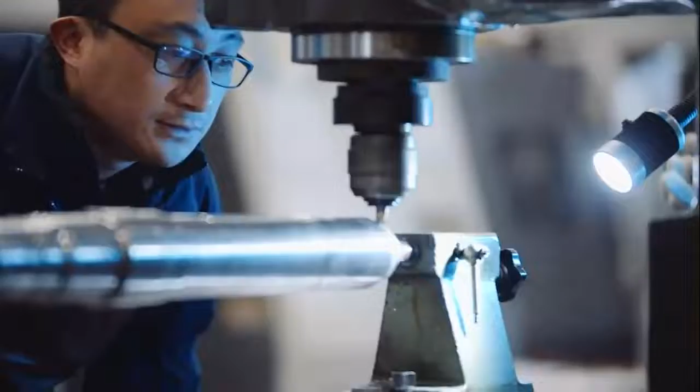Have you ever wondered what drives us? That thing that inspires us, makes our eyes shine, and motivates us to achieve more and more? We are WEG, driven by energy, technology, challenges, and opportunities. Therefore, every day we take new steps, open new paths, and evolve, addressing the future as a subject of the present.

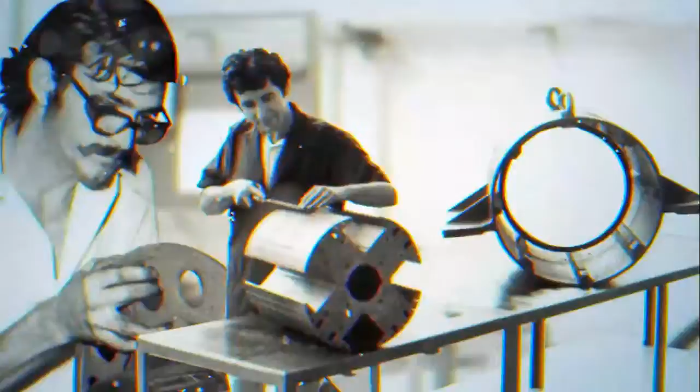WEG has always kept an eye on the future. Everything started in 1961 in the city of Jaraguá do Sul, when an electrician, an administrator, and a mechanic decided to join experiences to start an enterprise. Werner, Eggon, and Geraldo founded WEG. Initially producing electric motors, WEG grew year after year, expanded its product line, and turned into a global solution with electrical machines and automation for the industry and power systems.

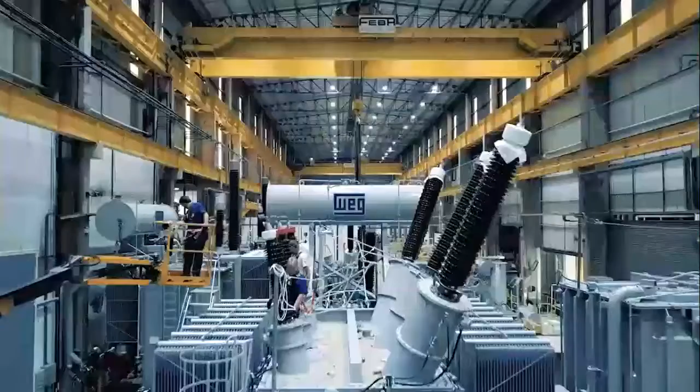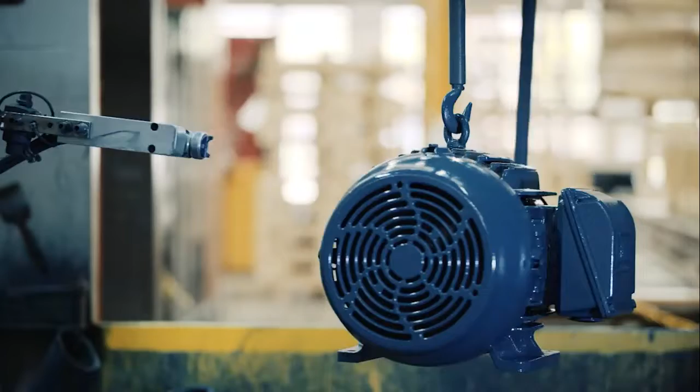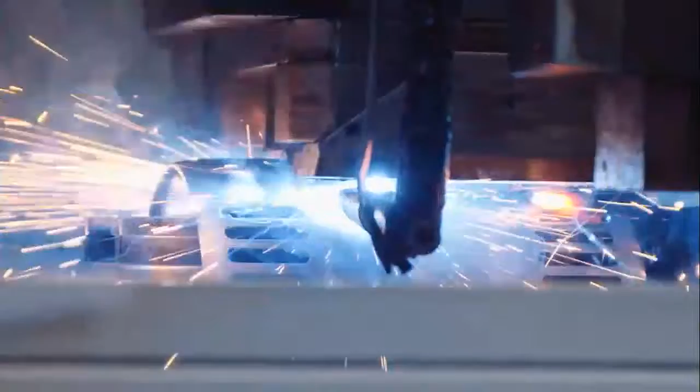When it comes to energy, WEG is the name that you commonly hear. In addition to being one of the largest manufacturers of electrical machines in the world, WEG is a synonym for intelligent technology solutions, offering products that consume less energy, produce more, and automate processes. Our electric motors are a good example. Developed with constant technological evolution, they deliver high performance and maximum energy efficiency.

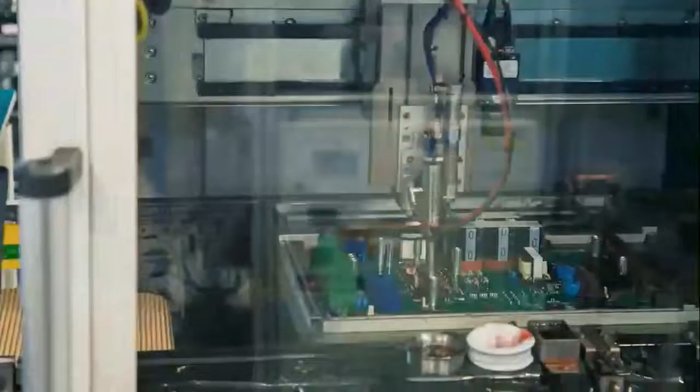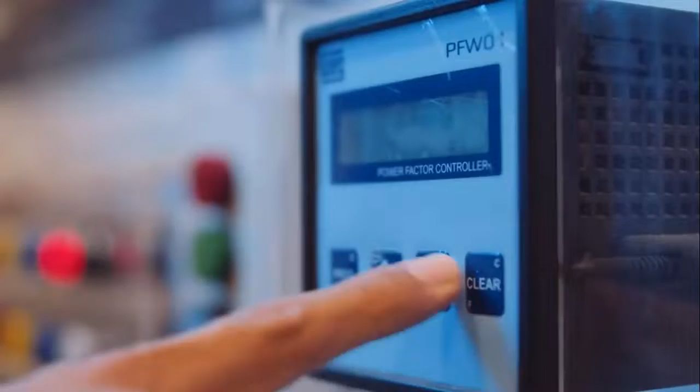In the generation, transmission, and distribution of electric energy, we have the challenge of creating renewable energy sources, meeting social, economic, and environmental demands. We also develop innovative, efficient, and safe products to protect electronic equipment and information. In addition, we produce solutions for electrical mobility, develop automation technology for enterprises, and make liquid and powder coatings and electrical insulating varnishes. Whenever a new energy issue arises, you can bet we at WEG are already studying the subject.

Evolution and continuous improvement are in our DNA. We believe that it is always possible to do better. Thinking about technological innovation is a culture that has been present since the foundation. With an eye on the future, we at WEG work to become more competitive, more connected and efficient, contributing to the sustainable development. Foreseeing trends such as Industry 4.0, new energy sources, and electrical mobility, working to create more efficient industries and cities, being in constant evolution, always seeking new technologies and solutions.

The constant investment in research and building of a robust team of experts in Brazil and in the world dedicated to generating ideas have produced an increasing number of innovations. What the world will see tomorrow, we at WEG are developing today. If there is one thing we like, it is facing challenges. Whether locally or globally, we keep on crossing borders.

The internationalization of WEG began in 1968. In the 90s, this process gained momentum with the opening of offices in strategic countries. The 2000s were decisive for our global presence, with the installation of the first manufacturing plant abroad. This will to expand horizons only grows and motivates the search for increasingly demanding international quality levels. Today, we have manufacturing plants in 12 countries and a business office structure able to serve the whole world.

Every day, several opportunities for personal and professional development are created. One of them is the WEG Training Center, a vocational training school that qualifies the young apprentice to work in technical activities. Founded in 1968, the center has trained thousands of students, preparing them to be part of the technology and innovation world, and teaching them ethics and integrity concepts. WEG's cycle of opportunities is completed with technical courses and job openings available at the units around the world. Thus, each employee has a chance to develop both professionally and personally.

We are WEG, driven by energy, technology, challenges, and opportunities. A company that will keep every day taking new steps, opening new paths, evolving and addressing the future as a subject of the present. WEG, transforming energy into solutions.

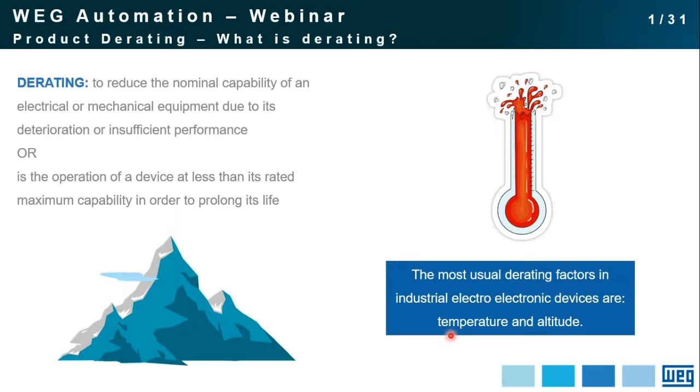So what are the most usual derating factors? So for the industrial electro-electronic devices, we consider that's temperature and altitude. So what is temperature? Basically, temperature is the measure of the average kinetic energy of the particles of a substance. Basically, it's what you measure with a thermometer in a comparable scale that can be degrees Celsius, degrees Fahrenheit, or Kelvin.

Another concept that is really close to temperature is heat. So what is that? It's the thermal energy in transit. Basically, it's the energy that flows from a hot body to a cold one. Basically, it's the flow of energy between bodies. And how does the heat transfer? Basically, it can happen through three ways. Conduction, which is through solid materials, convection, which is through the movement of air, and also through radiation, which is through electromagnetic waves.

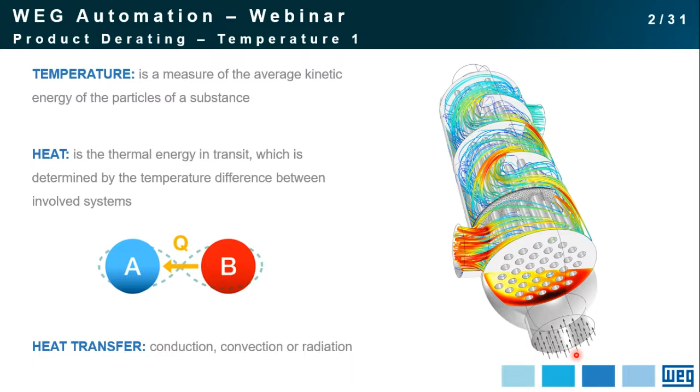So what are the problems and risks that you can have by applying a product in temperature above its nominal? So properties can be altered. So color can change, consistency can change. You can also have deformation of the materials, and then it can lead to equipment breakdown and maybe even constant replacement, which will affect your productivity in your process. So you can not only lose money by changing components in a machine, but also because you cannot make your production constant. And at the end, depending on the problem you have, you can have a permanent equipment damage. So then you have to change the whole machine.

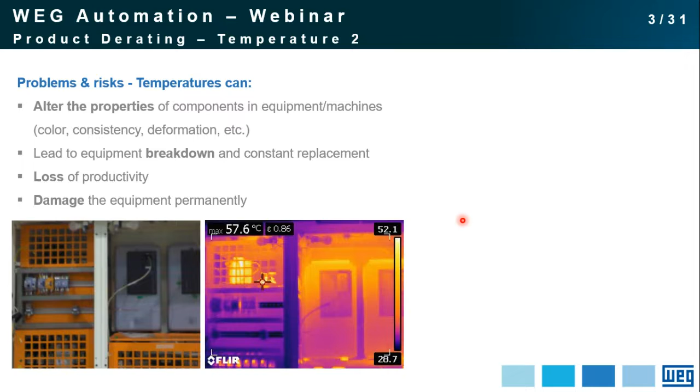Another concept I can give you here, another example, is for electrical motors. By using this motor at a higher temperature, for example 10 degrees Celsius above the thermal class limit of the motor insulation, you can reduce the lifespan of this motor by half. So imagine the impact that you would have in your industry, in your process plant, by having a reduced lifetime of all your motors, especially by half.

So where can we find these high temperature places? There are a lot of places on the globe where temperatures can be very, very high, like in arid regions or in tropical regions. And in those regions, we can find industrial installations where the internal temperature of the installation will be even higher. And imagine equipment inside a panel inside this installation in a very hot area. So you have this cumulative effect.

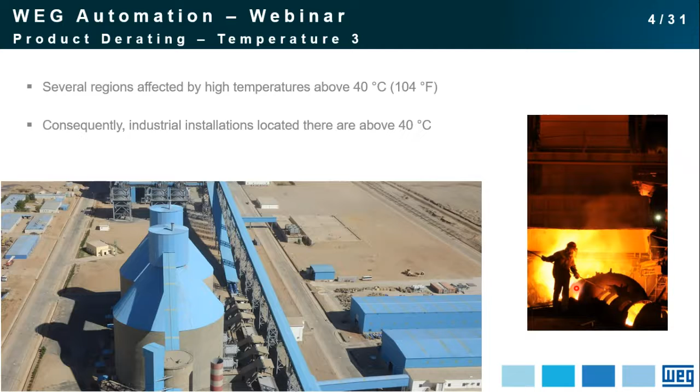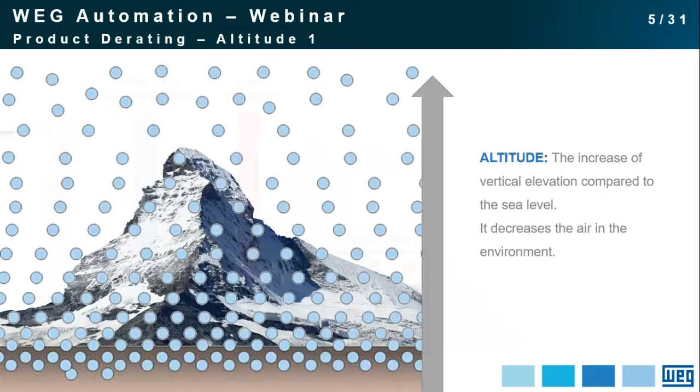But as time goes by, these blue particles representing the air surrounding the equipment will absorb part of this heat, and over time, the air around the equipment will absorb most of the equipment's heat, meaning that the equipment temperature will go down, the equipment will cool off.

But with the same equipment at a higher altitude, here at the peak of this mountain, that's not going to happen, because the density, the concentration of gas at the peak of this mountain, is not as big as at sea level, meaning you have fewer blue particles to absorb this heat. Even after some time, the air will absorb part of it, but not enough, because you don't have enough air to absorb this heat, meaning that the equipment will remain hot.

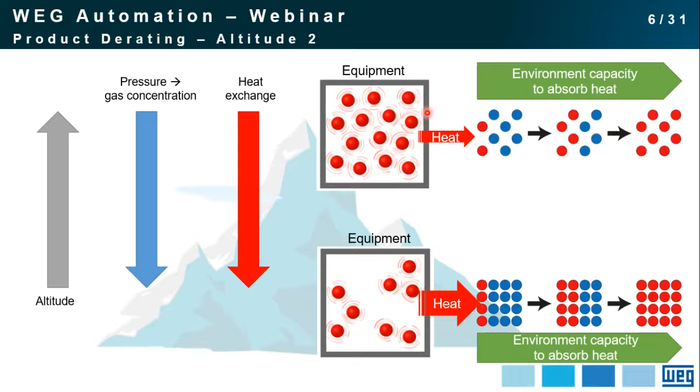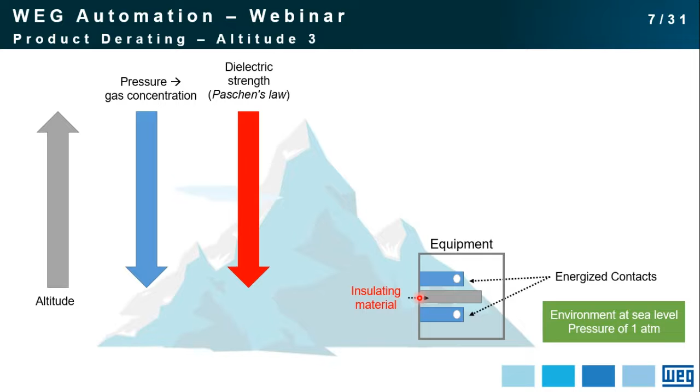Here we have another effect of altitude that can affect your device, your equipment. As we go up in altitude, we know that pressure goes down, gas concentration goes down, but also the dielectric strength goes down according to Paschen's law. So how does it happen? Let's take equipment, once again, at sea level with a pressure of 1 atm. Let's say it's a contactor. Here we have two energized contacts, and you have an insulating material between them. So the operation here is completely safe.

But because we are going up with the same equipment, the dielectric strength goes down, meaning that you need less voltage to break it. The breakdown voltage of the air at high altitudes is much lower, meaning that an arc could happen. And in this case, it would be a short circuit between phases, which can be really dangerous.

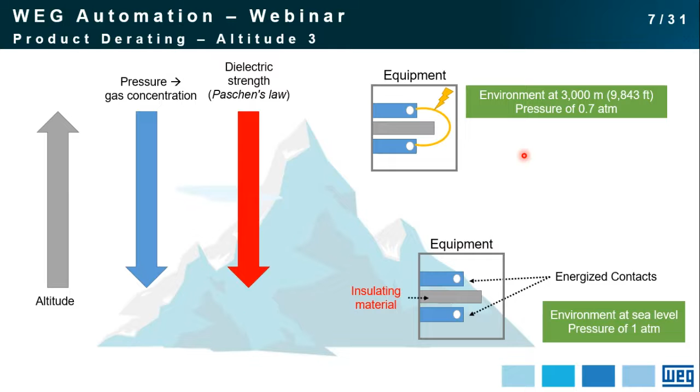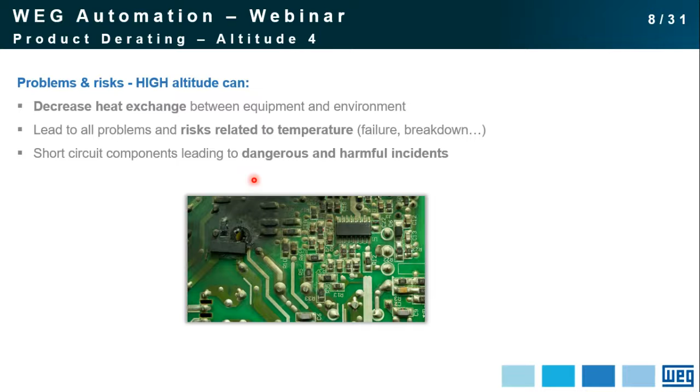So what are the problems and risks related to high altitude? So what can it cause? It can decrease the heat exchange between equipment and environment, which is bad. It can lead to all problems and risks related to temperature, like failure and breakdown that I have explained a few slides ago. And also it can lead to short circuit in the components, leading to really dangerous and harmful incidents like fire or something else.

So now that we have learned these two main factors that can affect the performance of an electrical equipment, what can we do about it? How do we solve it? Well, we have to apply some derating factors when needed. So the idea is to keep the life of the product operating in a lower capacity. But before we start, I would like to say 3 points.

First, all electro-electronic devices are subjected to these derating factors because the physics is there for everyone. If you take any product to the peak of a mountain, 3,000 meters high, they will be somehow affected. The temperature is the same. But in this presentation, and because this is a WEG webinar, I'm going to give examples with WEG products, obviously.

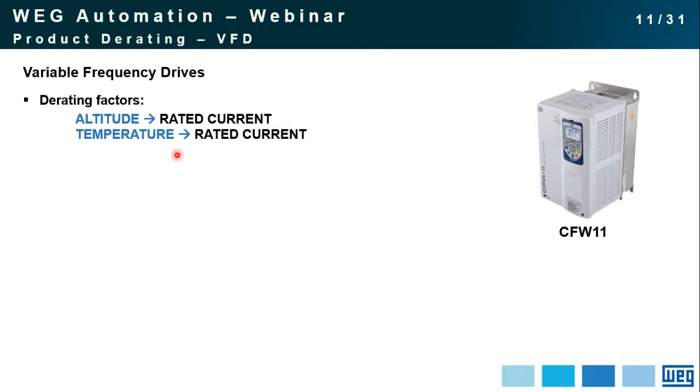Let's go to the first product. The first one is a variable frequency drive that I will simply call drive. The main effect of the derating factors is on the rated current. Both altitude and temperature affect the rated current of this product. So if we take technical data from this specific CFW11 up to 88 amps and in this IP degree of protection, we can learn that we can use up to 1000 meters without any derating, and we can use from -10 to +50 degrees Celsius normally.

However, if you have to exceed these limits because your application requires, we have these two tables here for each factor. First one is altitude. As we go up in altitude, we have to use these factors here. So if you have, for example, a 10 amp VFD and you have to apply it at 4,000 meters, you have to multiply by 0.7, meaning that the CFW11 can only deliver 7 amps. Another way of saying that, instead of multiplying by a factor, is decreasing by a percentage. I'm going to give some examples about it later.

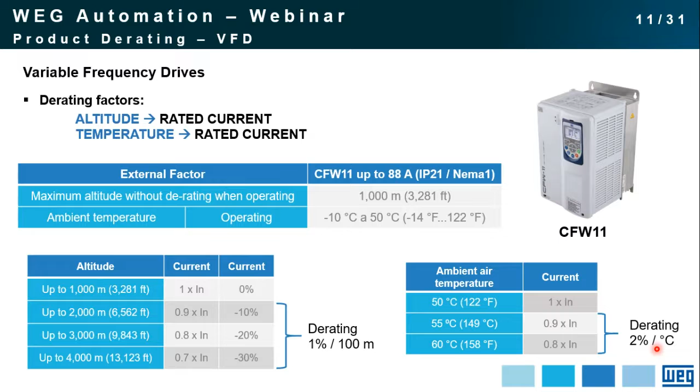And here on the right, we have a similar table, but for temperature. Another way of saying that is that in this case, for every 100 meters you go up, you have a derating of 1% in rated current. The same happens with temperature, however, it's 2% per degree Celsius. So let's make an example to clarify it. Let's say that you have to size a VFD for a 43 amp motor applied at 4,000 meters of altitude. What do we do?

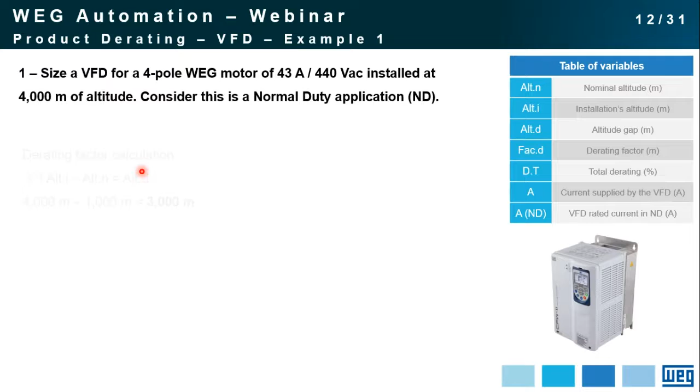First, you have to calculate this gap in altitude between the application altitude and the maximum altitude you can apply this VFD without any derating. In this case, it's 3,000 meters. Then use this value and multiply by the factor.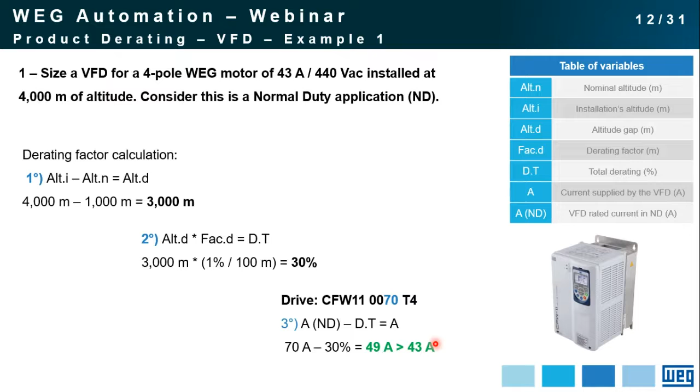We have learned that for every 100 meters you go up in altitude, you decrease 1%, meaning the total derating is 30%. So let's select, for example, a 70 amp VFD. You take the nominal current of 70 amps and then you decrease 30%. The final value is 49 amps, which is higher than the motor's current. So you can use it.

Let's make another example, but now with the temperature. Let's use this VFD at a higher temperature than the nominal one. The motor is the same. What do we have to do? Once again, we have to find this temperature gap between the application temperature and the nominal temperature of the VFD. So this gap is 5 degrees Celsius.

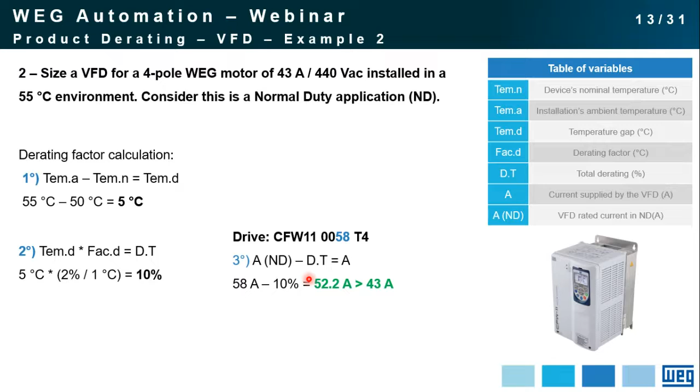Then you multiply by what? By the 2% per degree Celsius you go above the limit. So the total derating is 10%. So let's select here a 58 amp VFD, and then we decrease this 10% of the derating. So now let's say the max current that this VFD can deliver at this condition, 55 degrees Celsius, is 52, which is higher than 43. So okay, you can use it.

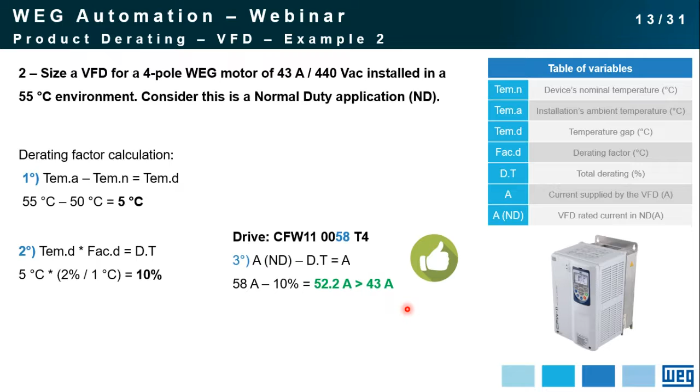Last example for VFDs. You might question yourself, what about an application where we have both derating factors, the altitude and the environment, so 4,000 meters and 55 degrees Celsius environment? So let's see. In the previous examples, we have learned that the altitude derating is 30%, the temperature derating was 10%, so the total derating would be 40%, or the factor would be 0.6 if you sum them.

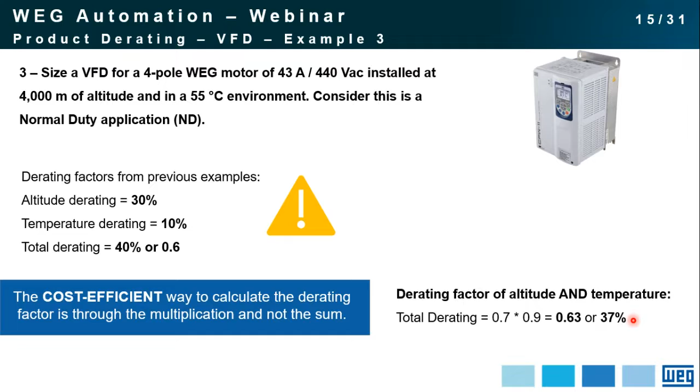However, that's not the most cost-efficient way to calculate the derating factor, because actually you can multiply them instead of making the sum. Why? Because factors, they can compensate each other. So instead of making the sum, you multiply, and then the factor, instead of being 40%, is going to be 37%. Let's take a look at this table here.

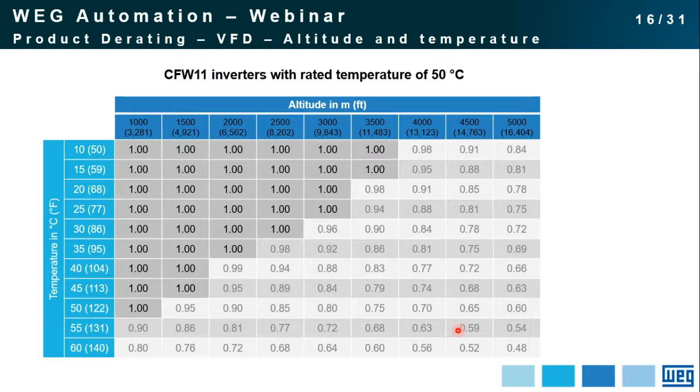Let's go back to the example and see what happens. So if we take an 88 amp VFD and decrease the total derating factor, using the sum, you find that this VFD can deliver 53 amps, which is higher than 43. There is no problem, it will operate correctly. However, maybe it's too much for this application.

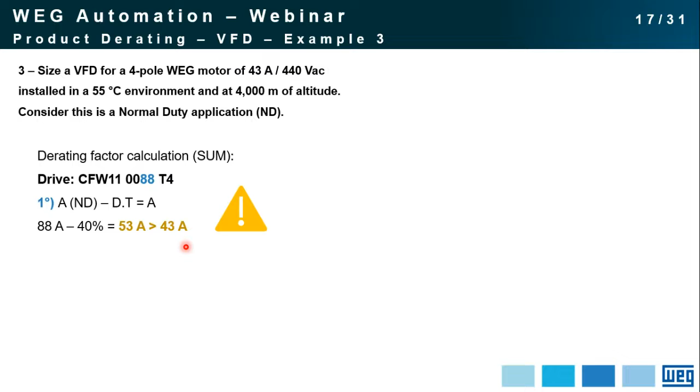By using the table I have just shown you, we can use a new factor which will allow us to use another VFD, a 70 amp VFD. So instead of using an 88 one, use a 70, because the new rated current of this VFD in this specific application is 44 amps, which is more than 43.

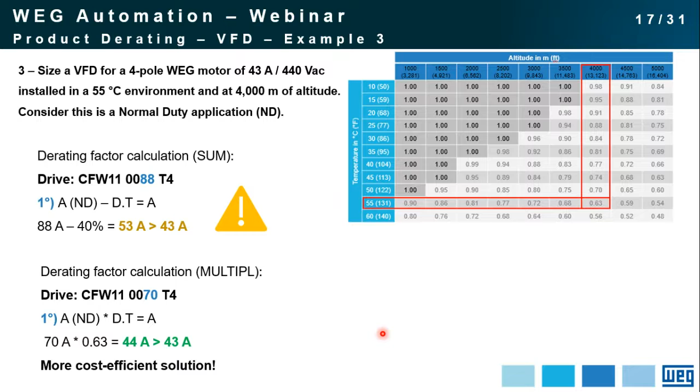So with this solution, we are more cost efficient, because as engineers, we cannot provide only the suitable technical solution, but also the most cost efficient one, because we know very well that money is a limited resource. So yes, you can use this one. And just by using a smaller VFD, you can have a lot of savings, especially in big plants.

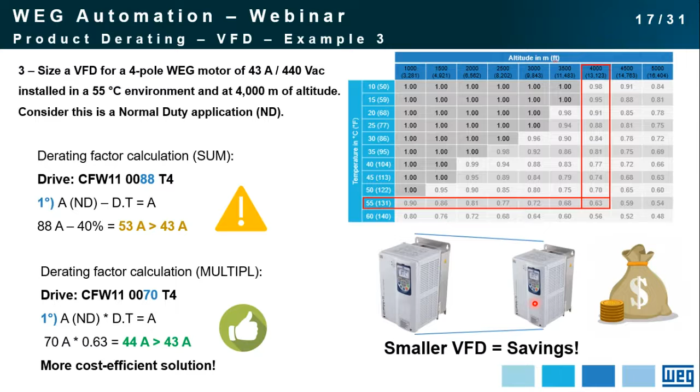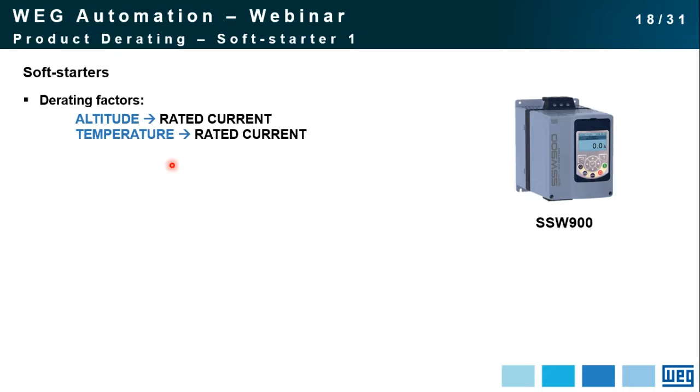So now we are going to move to another product, the soft starter. Once again, the derating factors, altitude and temperature, they do affect the rated current of this product. If you take the technical data of this SSW900 from WEG, we learned that up to 1000 meters, there is no derating here, as we can see.

Up to 412 amps, this product can be used up to 55 degrees Celsius without derating. And from 480 amps and up, you can use up to 40 degrees Celsius. And above that, you can apply some derating. We're going to talk about it in a moment.

So for altitude, we have this table here with also these derating factors. It's very straightforward. However, when temperature varies, there is no simple table where you can get a factor. You really have to learn how this soft starter is used. I'll give an example right now.

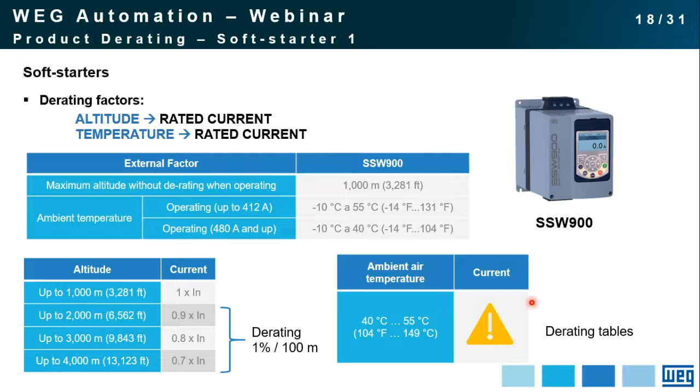So you have to learn about the application, the utilization category of this soft starter according to this IEC standard, which is the IEC standard for low voltage components, and especially here soft starters, and the duty cycle of it. Why? Because the application of soft starters can vary a lot.

Here I'm going to show you an example of how WEG describes the application of a soft starter, very briefly. So this code here is a way to summarize several data. The first part here, we know that's the full load current of the soft starter. The second part, AC-53a, means the utilization category, and in this case is a soft starter without integrated bypass. 4 means the start current, 30 is the start time, 50 is the duty cycle, meaning 50% on, 50% off, and the last number here means the number of starts.

But we could have another application in which a 130 amp soft starter is being applied with an integrated bypass, the start current is now 3, the start time is 30, and the normal condition time is 330, meaning that you're going to have 10 starts per hour.

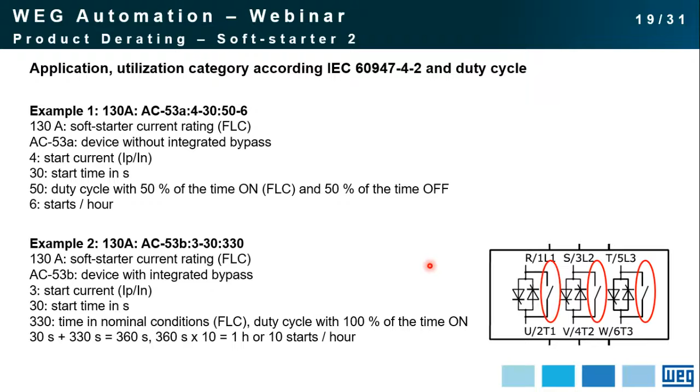So here on the right, we can see a picture of a soft starter with integrated bypass. During the start, all the current goes through the semiconductor switching devices, but then after the start, this switch here is on, so all the current is carried here. That means that by doing so, the lifespan of these semiconductor switching devices is extended because you are not using them all the time. And just so you know, all models of SSW900 have bypass.

So now that we have learned that we have to be very specific with the application of the soft starter, we can use a table to derate it. This table here considers a soft starter being connected with 3 cables at 55 degrees Celsius and 5 starts per hour. So here we have some models of SSW900, and as we go right in this table, we see that the start current goes up 2.5, 3, 3.5, 4, and on and on, meaning that as we go right, the derating factor is higher.

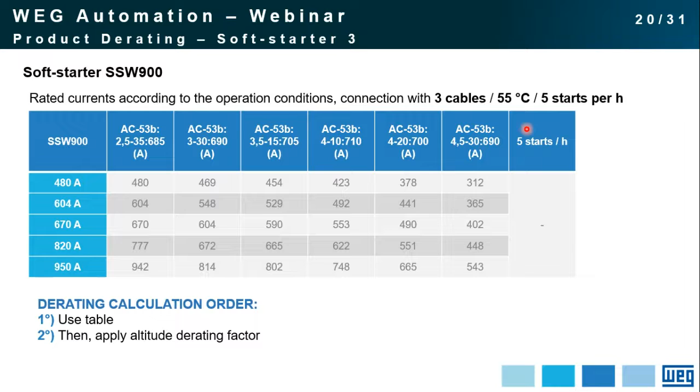So now that we have learned how to select the current according to the application, how do I make the full derating of a soft starter considering temperature and altitude? First, use this sort of table that's available in our technical materials, in the user manual of this product, and then you apply the altitude derating factor. In case you have other sorts of connections, for example, inside the delta, other temperatures, or other numbers of starts per hour, just check our documentation as well. We have tables for several applications.

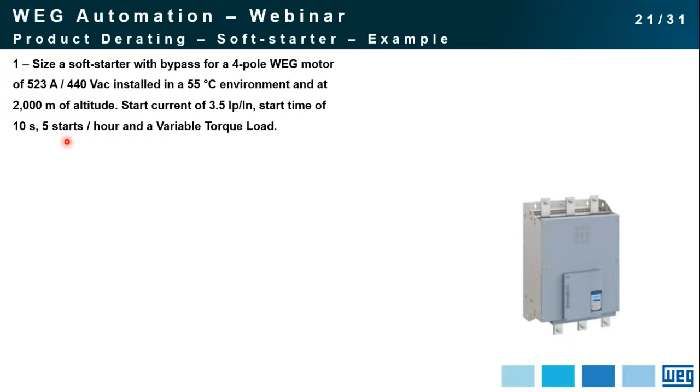Okay, let's give an example. So we have this soft starter, and we have to apply it to a motor of 523 amps, and the environment has a temperature of 55 degrees Celsius and the altitude is 2000. It's given that the start current is 3.5 times the full load current of the soft starter. The start time is 10 seconds, and you have up to 5 starts per hour. And it's also a variable torque load. If you take this information, we can create that coding that I talked to you about before.

And by using this table, let's say we take a 670 amp soft starter and we cross it with this application, which is quite close to what we have here, this soft starter can deliver up to 590 amps. Then we apply the altitude derating factor. So we take the difference between the application altitude and the maximum altitude of the soft starter without derating, which is 1000 meters. Then you multiply by the derating factor, which is 1% for every 100 meters.

In other words, 10%. So finally, the 670 amp soft starter at sea level can deliver in this application, in this condition, 590 amps minus 10% for the altitude, meaning that the current delivered by this soft starter is 531, which is more than 523, the current of the motor. So yes, you can use it.

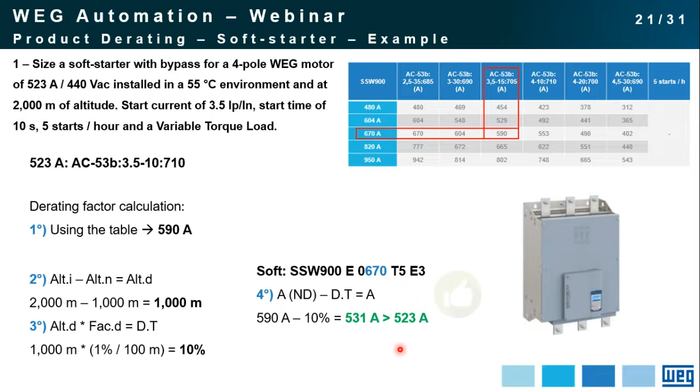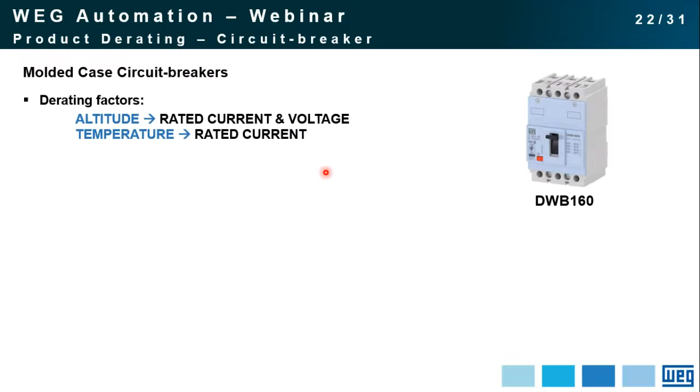So let's take some technical information from this circuit breaker. It's the DWB 160. The product catalog says that up to 2000 meters there is no derating, and up to 45 degrees Celsius also there is no derating. In case you exceed these values, as you go up in altitude, there is a derating factor for current, like shown here, and another one for voltage.

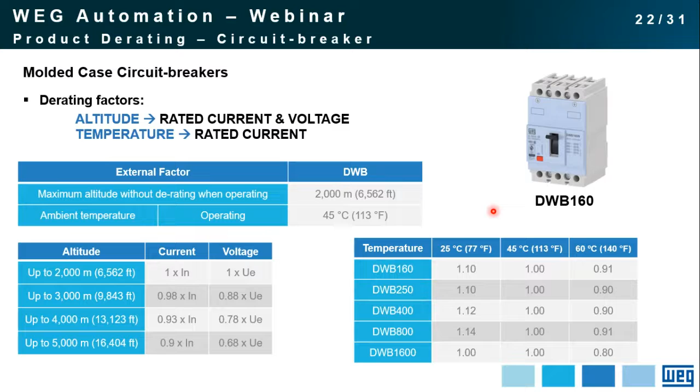And then for temperature, at 45 degrees Celsius, the factor obviously is 1. If you go up in temperature, you have a derating factor decreasing the total value of the circuit breaker. However, in lower temperatures, you can even have a boost in the rated current. But remember, you always have to consider the ambient temperature to make this sort of sizing. For more tables in terms of temperatures, you can check the product catalog.

So let's make an example to see what happens with the current and voltage. Let's see if this molded case circuit breaker DWB160 can be used in these conditions, 60 degrees Celsius and 3,600 meters. First, we use the derating factor of this circuit breaker. Here we have the rated current, 160. You multiply by the factor of current for altitude, 0.93. Then we use the other table for the temperature, 0.91. Finally, you have the current of 135.

Let's give an example about voltage. The original insulation voltage is 800 volts. However, when you apply the derating factor for voltage of 0.78, according to the table, it goes down to 604 volts, meaning that if for some reason you have a higher voltage than that in this product, an arc could happen between phases, for example.

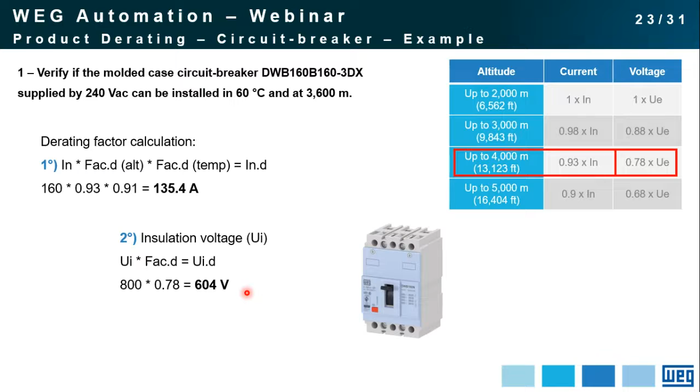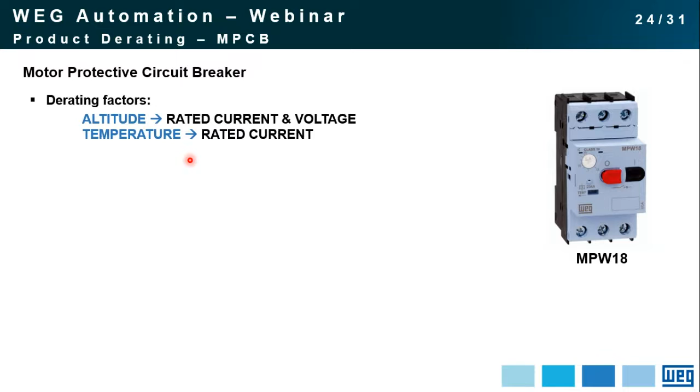Another product that's a circuit breaker as well is the motor protective circuit breaker. Once again, just like the MCCB, the molded case circuit breaker, the same factors apply, altitude and temperature. So this is technical information of this product, the MPW18. In this case, it can go up to 80. It's valid for all this range. What is different here is that this product has a temperature compensation device inside of it, meaning that from -20 to +60, you don't have to care about derating. But when you go up from 60 to 70, then you have to apply derating.

Here we have some tables showing us the factors in case we exceed these values, from 2000 to 5000 meters, current, voltage, and then the ambient temperature derating factor. So here the maximum operating temperature of this product is 70 degrees Celsius.

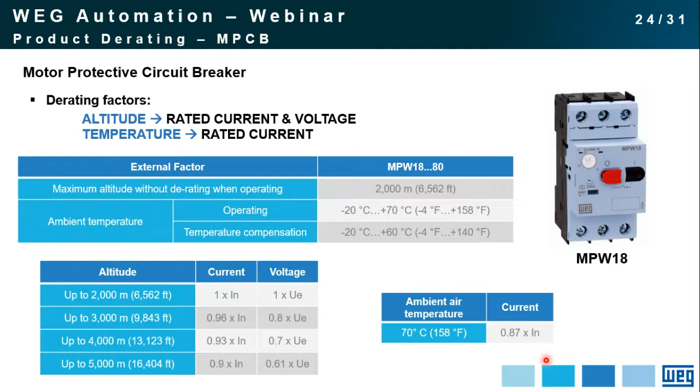Another product that we can talk about is the thermal overload relay. Once again, the same factors apply to rated current, altitude applies to voltage, so the insulation voltage is affected by altitude. Here, the technical data says that we can use up to 2000 meters without derating. The operating temperature is from -20 up to +80 degrees Celsius. That's due to the plastic materials we are using on it. And this device, just like the motor protective circuit breaker, also has a compensation mechanism, so that up to 60 degrees Celsius, no sort of compensation in temperature has to be done.

Once again, more tables giving us factors to reduce the rated current or voltage of this component in case we use it in higher altitudes or in higher temperatures. But I'd like to explain something that usually creates a lot of confusion in people's minds. This is an adjustable device, so you can set the current to be protected. How do I adjust it, considering that now I have a derating in the current?

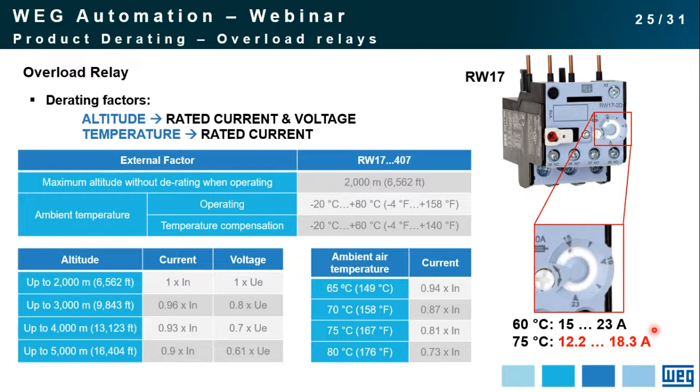The dial here shows that up to 60 degrees Celsius, because there is no derating at this temperature, you can protect a three-phase motor from 15 to 23 amps. However, if you take the same product to a place where the temperature goes up to 75 degrees Celsius, even though it's showing 23 and 15 amps, actually this overload will protect from 12.2 to 18.3 amps. The same happens to other adjustable devices like the MPW I have just shown you.

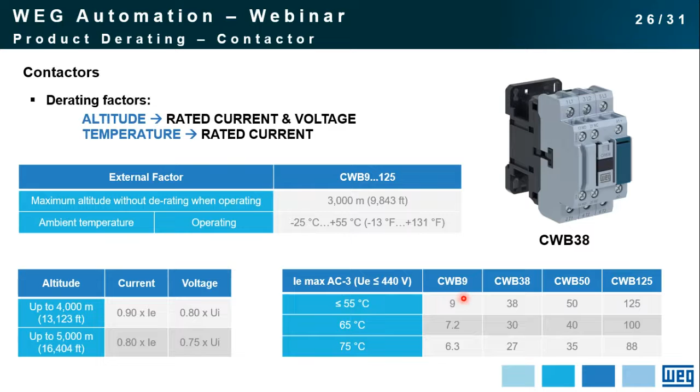And the non-derating range of temperature, let's call it this, is from -25 up to +55 degrees Celsius. In case you exceed it, we have tables showing that to us. So up to 4,000, 5,000 meters, we have these factors here. And here on the right, we have a table giving us the maximum current that a contactor can deliver in different temperatures. Okay, enough tables, let's make an example.

So let's check if a direct online motor starter comprised of a motor protective circuit breaker MPW40, maximum current of 40 amps, and a contactor CWB38, so nominally 38 amps, assembled inside an electrical panel, is correctly sized to start safely a motor of 38 amps.

Here the ambient temperature given is 55 degrees Celsius, but this temperature is outside the panel. So what would be the temperature inside the panel? Well, you have to measure. In this case, we are considering 60 degrees Celsius. This temperature varies, and it depends on the number of components you have inside and how much heat they dissipate, so each case is different.

So let's first take a look at the MPW40. Up to 60 degrees Celsius, there is no derating, so you can use this MPW40. Then let's take the CWB38. Up to 55 degrees Celsius, it can deliver 38 amps. However, at 60 degrees, using the 65 degree data that we have available, it can only deliver 30 amps. So we cannot use this one.

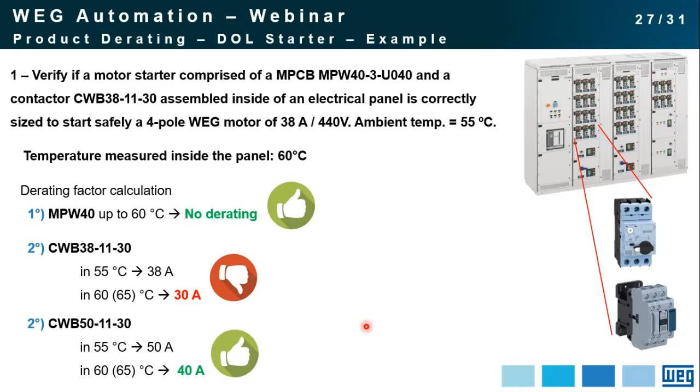Let's move to the CWB50. Up to 55 degrees Celsius, it can deliver 50 amps, and up to 60, or actually 65, but as the application is below this limit, it can deliver 40 amps. So yes, you can use this contactor. So the new starter will look like this: the MPW40 is okay to be used, but the CWB38 has to be replaced by the CWB50.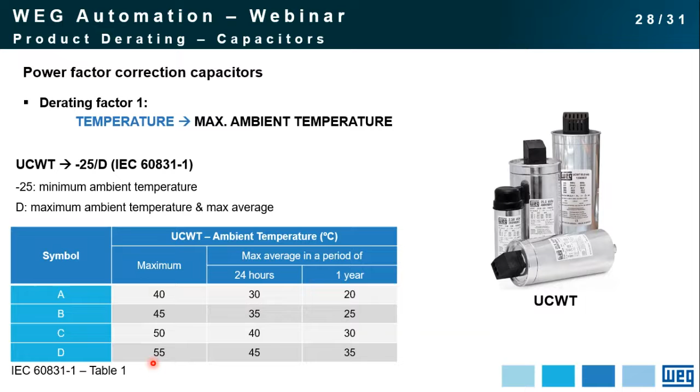But what happens if you have to apply this product at a higher temperature than this one? You have to guarantee that the temperature cannot go beyond this limit, either by natural ventilation or through forced ventilation.

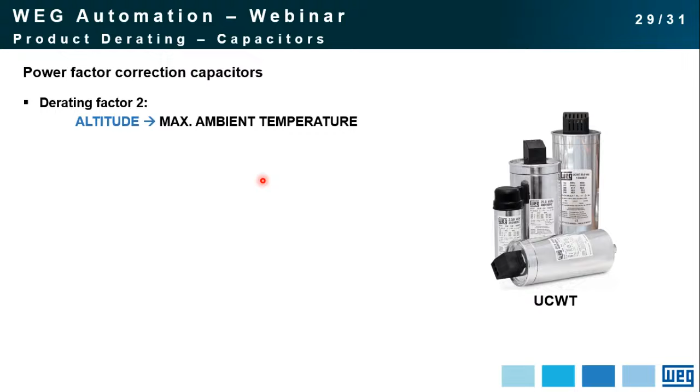The other factor is altitude. And once again, that affects the maximum ambient temperature of this capacitor. As we go up in altitude with this product, the maximum temperature surrounding the capacitor has to decrease. And once again, if you have a higher temperature than expected, you have to use forced ventilation. But there is a positive effect: as you go up in altitude, the ambient air temperature goes down, making your job of reducing the temperature around this capacitor easier.

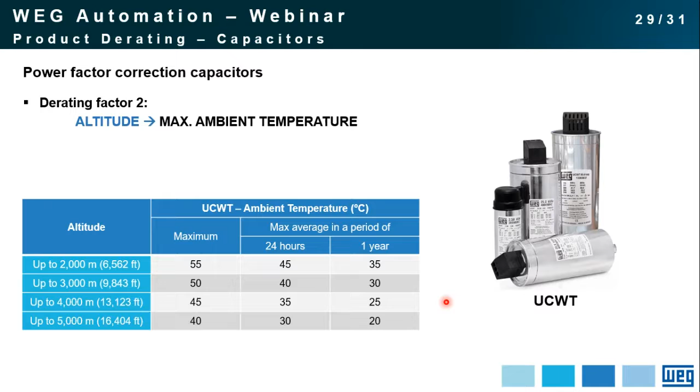So now we are closing this webinar, but first I would like to give a wrap-up of this presentation. So what can you take from it? You have learned that temperature and altitude are very important factors when you are applying these electronic devices.

You have to understand very well your application and environment, because these harsh environments, these harsh applications can definitely alter the functioning of the product. You always have to check the industrial automation devices technical materials, because just like I said, for every different product I talked about here, tables change, the derating factors change.

Finally, you can always count on WEG for support to apply products, these automation devices in harsh environments or even in normal ones. So if WEG products can be applied in harsh environments, you can imagine that our performance in normal conditions is going to be really good.

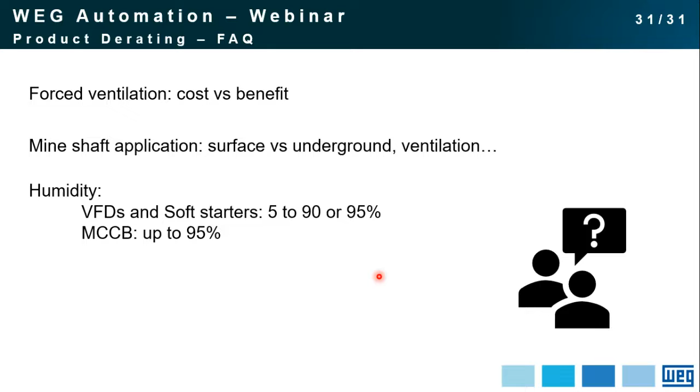And that can lead to another harsh environment, which is the low temperature one. I haven't said much about low temperature, but that can be solved once again by using space heaters. So before using your application, you have to warm up your panel so your components, your devices can operate correctly. And in conjunction of humidity and low temperature, not only water you can find in your panels, but even ice. So you have to make sure that you first melt down the ice and then you start your panel.

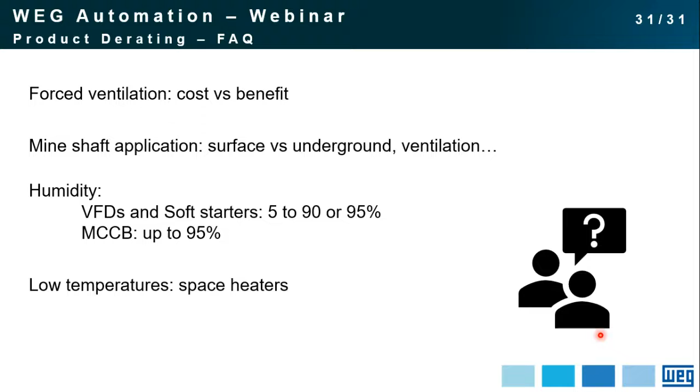So this is it for today. Thank you very much for your time here. I hope you have learned new concepts, new knowledge about application of these automation products in harsh environments.